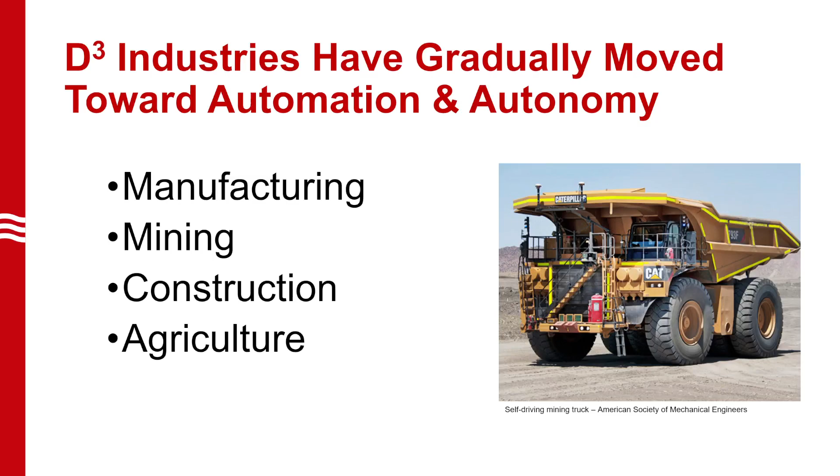On the machinery side, you've got the cotton gin, the steam engine, the tractor. Eventually, instead of transmitting power by belt, we moved to power takeoffs, and we have hydraulic systems. Now we have fully self-propelled harvesting equipment. It used to be that we pulled things in the past, my dad pulled corn pickers, and silage harvesters were pulled implements. Now we're rapidly moving toward electrical and electronic monitoring and control. This is the direction we're moving, and we have always moved toward more technology and more innovation.

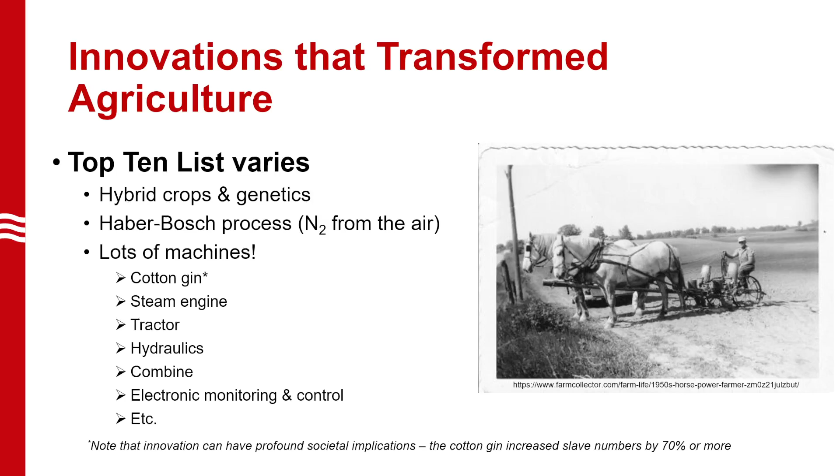So my point in telling you this is as we move towards higher and higher levels of technology, there are a lot of benefits, and I'll talk about those as we go forward. But we also have to be thinking about some of the other unintended consequences in our communities, our educational systems, our local businesses, big and small, and make sure we're thinking about it from a larger, societal perspective. That's part of the effort I'm helping to lead at a national level.

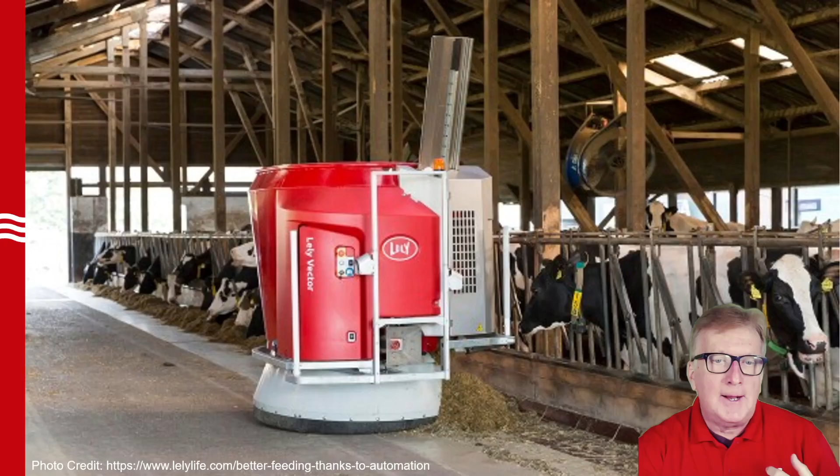I think in the dairy industry here in Wisconsin and throughout the Midwest, we're really wrestling through where this goes, and right now there's probably not a real clear consensus. It's probably also going to depend quite a bit in the future on labor policy, immigration policy, and our ability to bring workers into places like Wisconsin to do some of these jobs that other people in smaller or medium-sized rural communities don't necessarily want to do.

Consolidation, or another way to say this, is we have small companies building, inventing, and developing machine learning software, algorithms, and hardware for field operations, or maybe orchards in California, other crop production situations. Those that show great promise are then snapped up or bought by some of the bigger companies and bigger players, including some you'll probably recognize, obviously John Deere in this particular instance.

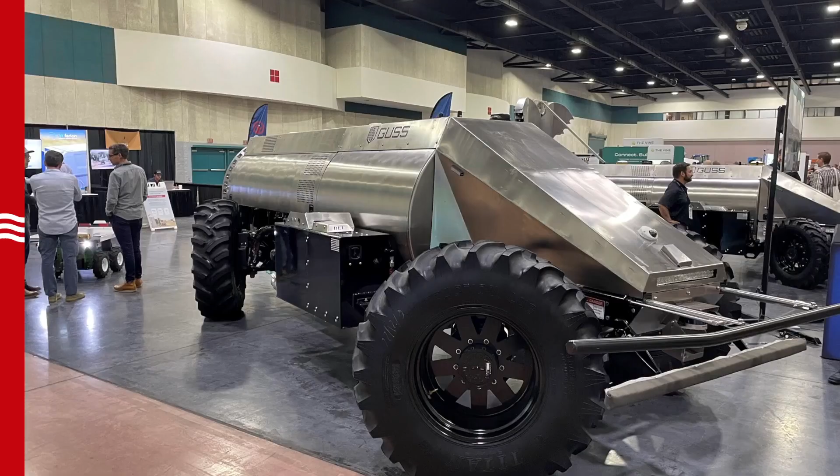Here's another quick example. This is from a conference I attended back in the latter part of 2022. This particular piece of equipment is a GUSS sprayer. You see it's this metal body sprayer. The large cylinder in the middle is the tank. This particular sprayer is designed to operate by itself. There is no operator's platform. It's not necessarily remote controlled, but it is guided by a combination of machine vision, artificial intelligence, and machine learning.

It's full of different safety sensors. Actually, a couple you can see in the front. There's like a bumper, it actually looks like a big handlebar. That's if a person does come in contact, or if the GUSS sprayer encounters an obstacle, it's designed to stop. You also see in the very front, it looks like a little bubble, a little eye. There are cameras, there are sensors.

There's a technology called LiDAR, which is now being used on a lot of these pieces of equipment. Think of a LiDAR as like a radar, but instead of bouncing radio waves, you're using light and calculating the distance for different obstacles and things you may need to sense. It could be a person, a fence post, a dog, a cow, whatever it might be.

We need to make sure that this equipment is fully capable of sensing its operating environment, and then knows when to stop or knows when to take appropriate actions. That's what a lot of my work is focused on as a safety specialist.

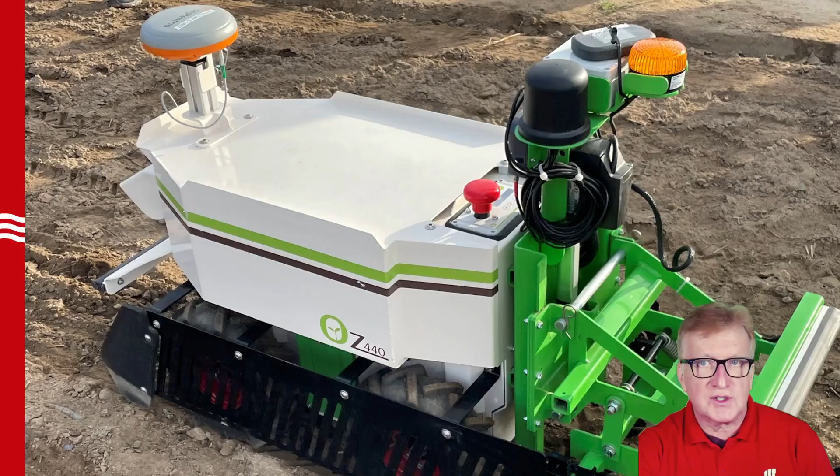This is an example of a smaller, I guess we could call this a tractor. It's about the size of a picnic cooler, these smaller things that are able to do garden or plot size operations, like planting and tillage.

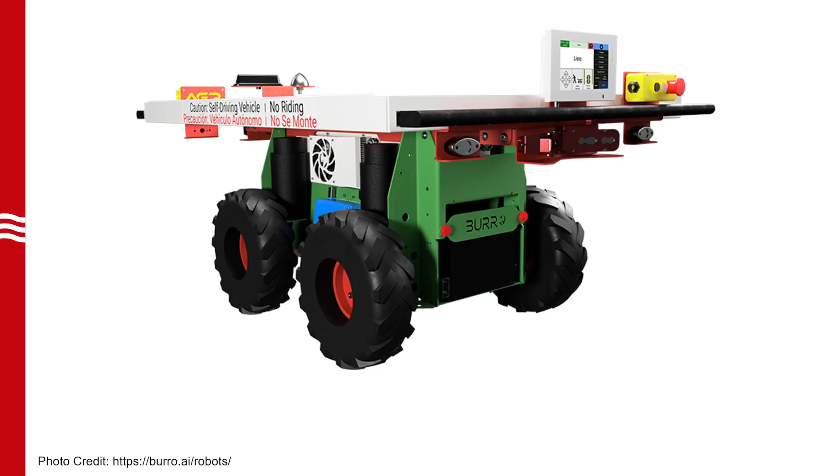And then we also see what I'm going to call helper robots. I think the brand name on this is Burro. These are being used now out in California. It's basically a UTV, a utility vehicle or ATV, that is designed to operate on its own. In orchards or vegetable or fruit crops like strawberries in California, Florida, Texas, Arizona, right now workers will pick a basket or bag full of produce and then have to carry those containers back to the end of the field, which is a very inefficient operation.

And now we're beginning to see these self-driving vehicles, these self-driving UTVs that are able to go out, pick up product. It knows how to get to the end of the field. It's able to learn what fields look like. It's able to be remote controlled with a smartphone or an iPad. And we see more and more use of these kinds of things happening. Actually, I accidentally skipped a slide. Coming back to it, I do want to just spend a moment talking about this technology.

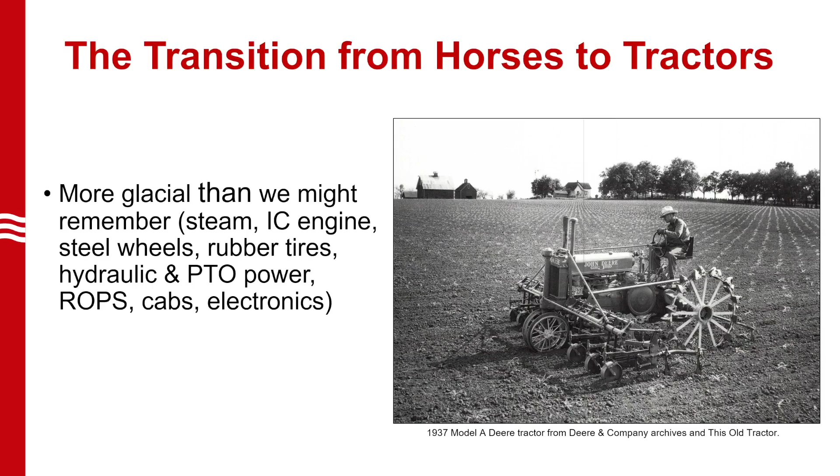Then we began to add other types of components—hydraulic systems, power takeoff—and then we did start to think about safety. We started to think about lighting and marking and rollover protection, ROPS. As we moved toward the latter part of the 1960s and early 70s, cabs became commonplace, and during that time we began to introduce different types of electronics, monitoring systems, control systems, those sorts of things.

Now let me pause for just a minute and say safety was part of this. Believe it or not, in the early part of the last century, people said, I'm really concerned about this from a safety perspective. I know my horses, they're predictable. These machines are big and powerful. So there were actually the opposite concerns of what you might think about.

The bottom line is in 1943, that's the year for which we have the oldest data here from Wisconsin—this is on my webpage, I'll talk about that at the end of my presentation—we had 166 fatalities. That's 4 times what we have here today in the 2020s, 2019, 2020.

But we also had a lot more farms. We also didn't have the systems that allow us to do some of those CSI-style investigations. So my real guess is that number was probably in excess of 200 fatalities a year.

Interestingly, though, about 20 were from horses, 18 were from tractors. So we had this interesting situation where it's going to be something we're going to have to deal with, both horses and tractors. 7 were from bulls. But the bottom line is, as technology changes, it does change the nature and the characteristics of the safety-related hazards that we need to think about.

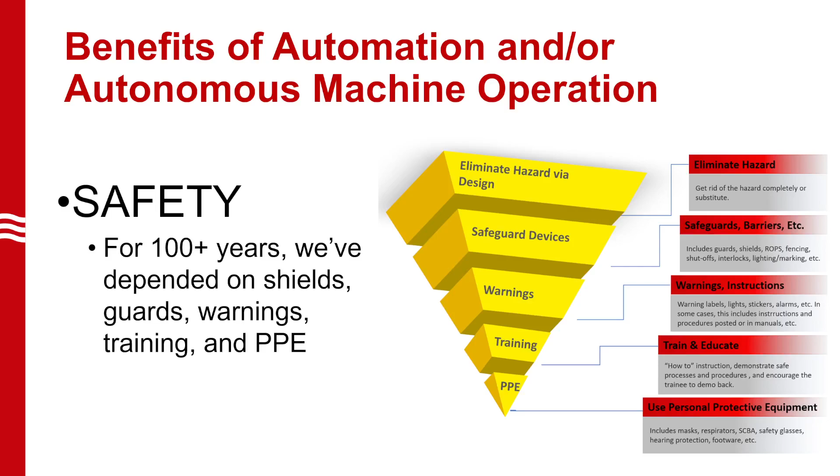We've been thinking about this sort of stuff for just as long as tractors and other types of equipment have been around. How do you eliminate the hazard associated with a tractor rollover? Well, we build tractors that have a wider center, a wider baseline of stability, they have a lower center of gravity. The old tractors from the 1920s, 30s, 40s, and 50s had the narrow front end, and those tractors were super tippy. So we haven't eliminated the hazard associated with tractor rollovers, but we've designed equipment differently. And again, that's the direction we're heading with these various forms of autonomy.

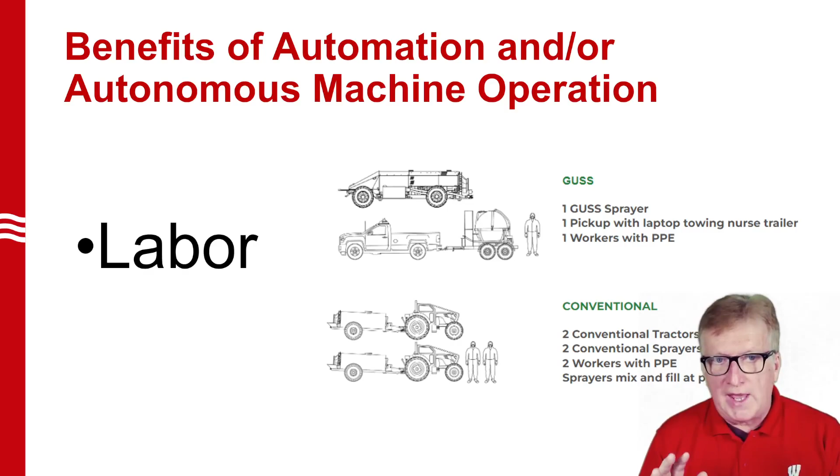Now, this is a little bit of a complicated slide, so I want to only spend a little bit of time on this. We do have the potential to save labor. This is a specific example from the GUSS sprayer, where on a small operation, you may go, just as an example, from 2 workers working in an orchard.

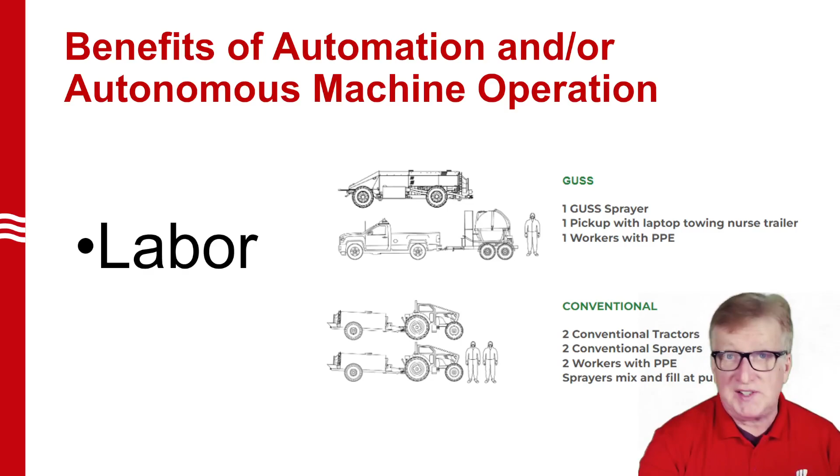Again, in California, a lot of this equipment is being used in orchard situations, but we're going to see the same types of applications here in the Midwest. You go from 2 workers to 1 worker with an investment in a piece of equipment like that big metal or steel sprayer. Where it becomes really attractive, economically interesting, is when you begin to look at larger and larger businesses.

This is where we start to see some of the custom operators and service providers benefit. On a small individual farm, you may see a 2-to-1 labor reduction. But if you think about a mid-size application business or commercial service, you might see a 4-to-1 or 5-to-1 reduction in labor. You're going to have to spread that investment over a large number of farms to justify it.

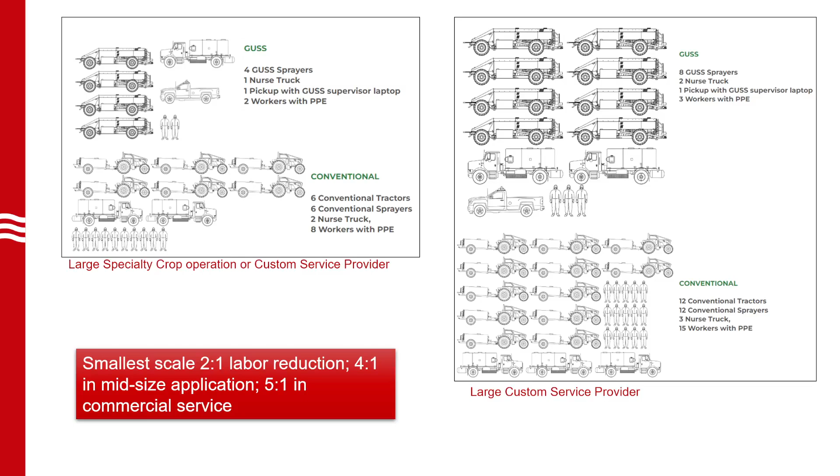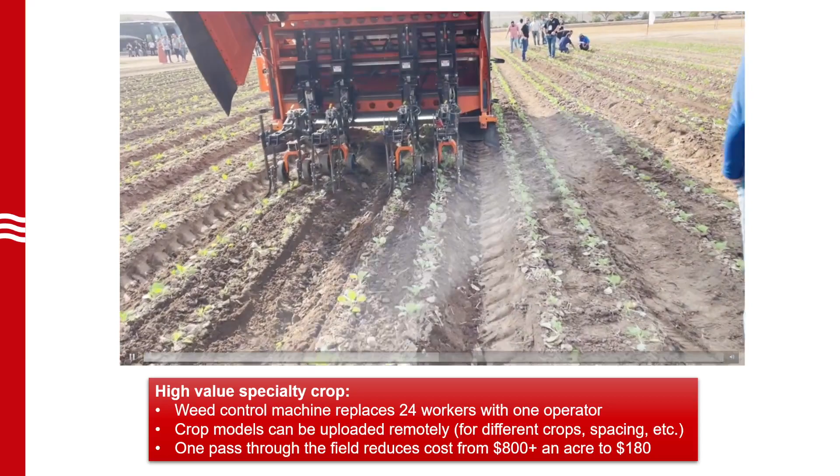So labor, kind of a big deal. Let me back up to this slide. What you are seeing here is a weeder. Again, out in California, this is something being done as a service. Now let me stop here and talk about what's going on.

What you are seeing is a weeder that is being used in specialty crops. In this particular case, I think this is a cabbage field. So what you see is one machine working in a field. This one machine is replacing 24 hired workers. It is being operated by a person walking behind the machine with an iPad, monitoring things, but you have a 24-to-1 reduction in the labor needed to weed this particular field.

What's interesting about this is it's all digital, connected to the internet, requires broadband. When the operator takes this weeder, loads it onto a truck, and moves it from field to field - say going from cabbage to romaine lettuce - there is a remote operator actually supervising a dozen of these machines located all over the country, and they are able to upload the right crop model, including plant spacing, row spacing, and all the parameters needed for the job.

From an economic and labor perspective, what you're doing is taking a piece of equipment and removing the ergonomic hazards. This would all be work done manually by hand with people, probably immigrant or migrant workers carrying hoes and other hand equipment. You have significant exposure to sun, skin cancer, those kinds of things, in addition to the ergonomic related hazards. And you're replacing 24 of those people with one person.

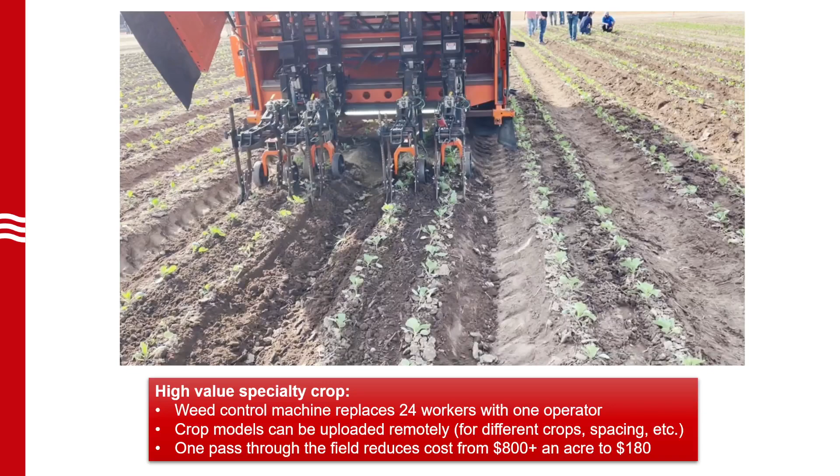Now, I'm not going to go back and restart this video, but I'd like to note - you might look at this and ask how and why is this any different than something I grew up with. I grew up doing this sort of work in corn and soybeans with an old John Deere 630 tractor and a front-mounted cultivator. So this machine is essentially accomplishing the same thing between the rows.

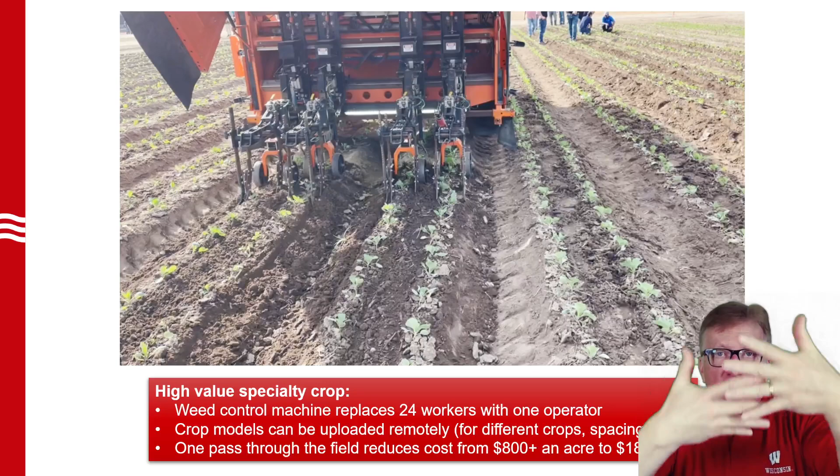But because this new automation has cameras, machine vision, machine learning, and artificial intelligence, not only is it taking weeds out between the rows, but it's also able to weed between plants without taking out the plants themselves. It can recognize and differentiate between a cabbage plant and a weed, and those little shovels, those little cultivating devices, are able to move in and out with hydraulic actuators and actually weed, not only in the row, but between plants as well.

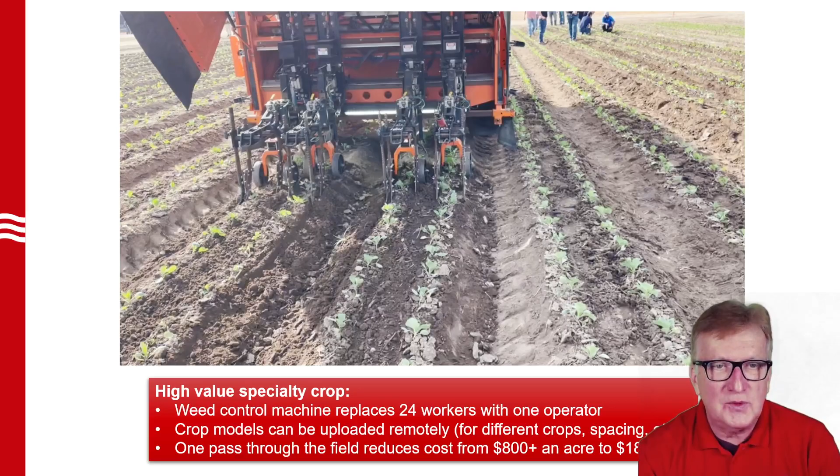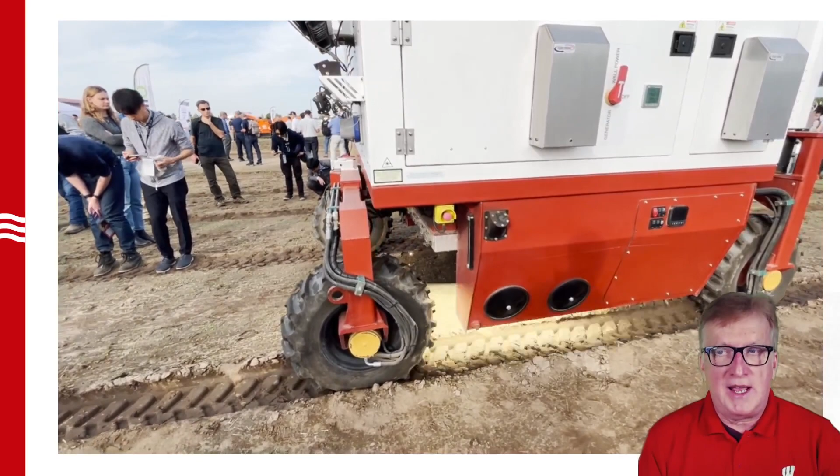Another quick example to show you here. Hopefully this is communicating and you're able to see the flashing lights that are happening. This is another weeder, and it's a laser weeder - you can imagine it is using a laser. This is operating in a high density crop, in this particular case spinach. As it goes through, you see the little weeds, the little fireworks happening between the wheels, and that's actually the laser beam that is killing weeds.

It's burning weeds using a CO2 laser. Probably not ever going to be practical for an individual farmer, an individual operator, but as a service, as a subscription service or a custom service, that's where this type of equipment shows great potential.

I probably should mention, we do have a number of industries here that are prominent in Wisconsin that are interested in this sort of thing and how we might adapt this, for example, to a cranberry marsh up in the central parts of Wisconsin. It's not going to be this machine in particular, but how might we think about these types of applications in the future?

The other thing I should mention from a safety perspective, you can imagine these new technologies eliminate some safety-related hazards, but they introduce others. You wouldn't want to have a child or a pet out working near a CO2 laser, because obviously if a person or a pet or an animal got underneath this particular piece of equipment, it could do great damage and harm.

So we have labor savings as a potential, we have potential safety benefits. I want to also just talk briefly about a few more things: the opportunity to reduce input costs and create a more sustainable situation. This is obviously a societal demand. All of these things are enabled and made available to us through high-tech sensors, machine vision, artificial intelligence.

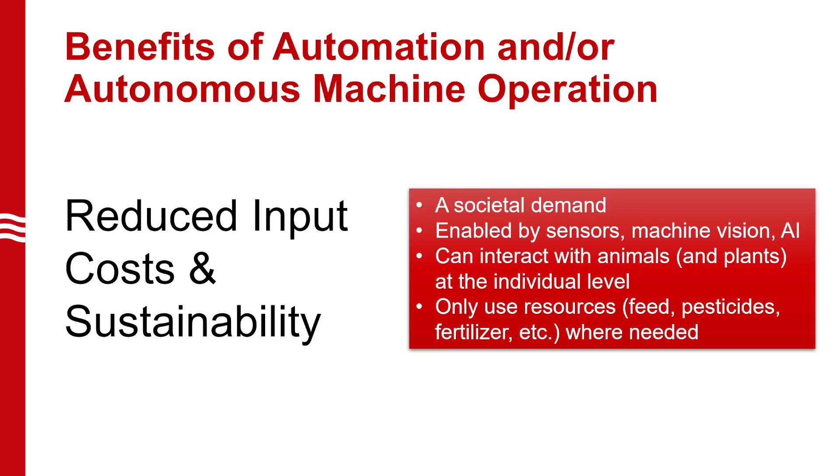We are then able to only use resources like feed and pesticides and fertilizer and especially water in areas and situations where it is most needed. What else? These allow for 24-hour operation, nighttime work operations. It's potentially a solution for people who have disabilities or physical limitations.

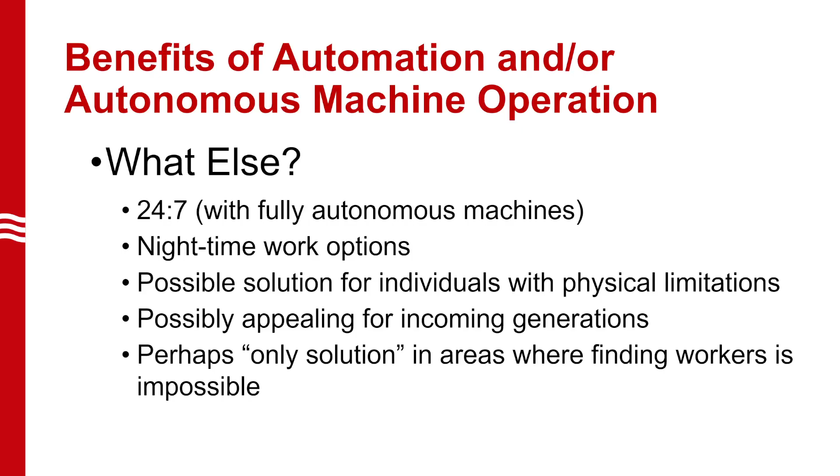The other thing that I find interesting about these new technologies, it is probably going to be appealing for the incoming generations. It is probably something that we're going to need to think about, whether you are a custom business or you are a farmer, in terms of succession and looking at bringing that next generation in. And again, as I've talked about, it could perhaps be the only solution in those areas of the state or those areas of the country where you're having difficulty finding workers.

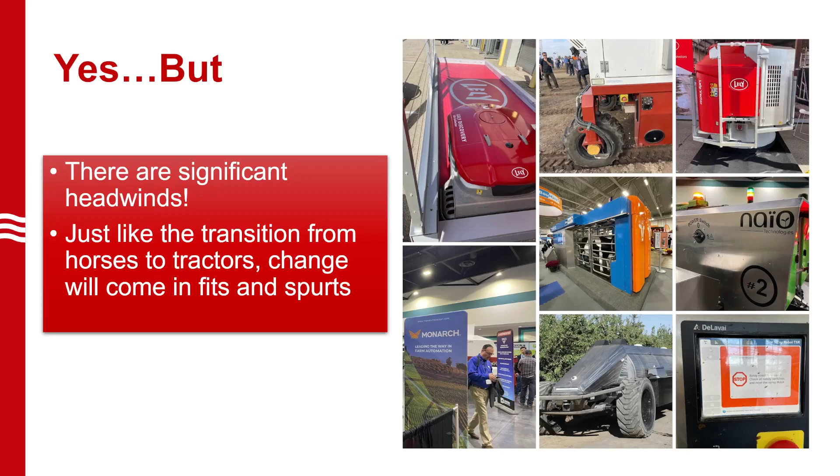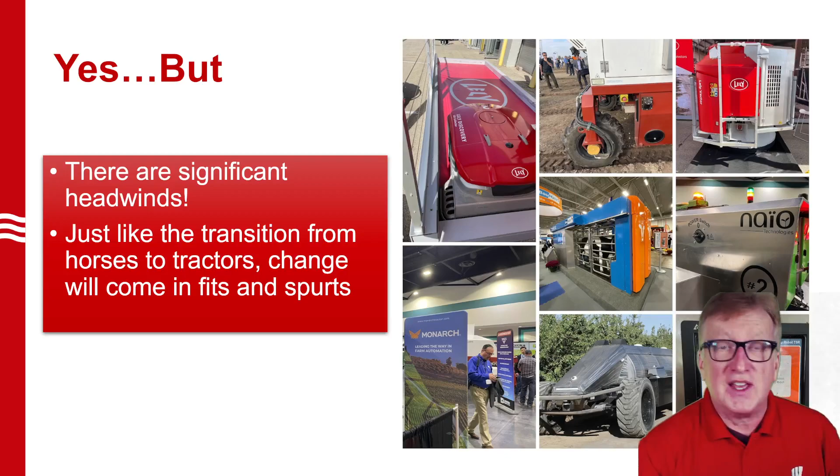So you can probably gather from my presentation, I'm a little bit of a technology evangelist. I want to be careful with that, though, because there are a lot of headwinds that we really do need to be thinking about. And just like that transition from horses to tractors, things are not going to happen easily. They are not going to happen overnight, and we're going to see fits and spurts happening.

In my work, because of my focus on safety, when we talk about automation and we talk about sensors and machine learning and artificial intelligence, it is a whole different world. Yes, we are designing out some of the hazards consistent with that upside down pyramid that we call the safety hierarchy, but we also need to be thinking about what types of new hazards might we be introducing.

We typically do that with a process that engineers go through. I actually teach it in the classroom, called risk assessment. And with risk assessment, you look at things that have happened in the past and you make sure that you apply the appropriate types of design principles and design standards so that you improve the safety of the system that you are inventing or designing.

The problem is risk assessment requires data, and with brand new forms of equipment, we simply don't have that data. I've done 150 of those CSI style investigations on tractor rollovers and power takeoff entanglements, but I've not yet done one on a robotic injury or fatality. I don't know that there have actually been any, but in the future there likely will be.

And so the question is, how do you assess risk in an environment where you don't have a past history? That's really a big focus of the work that I do. And it is also, not having that data is actually something that is creating a bit of a barrier. So risk assessment requires data. And what about the new hazards associated with artificial intelligence? We don't always know exactly how these machines are going to operate.

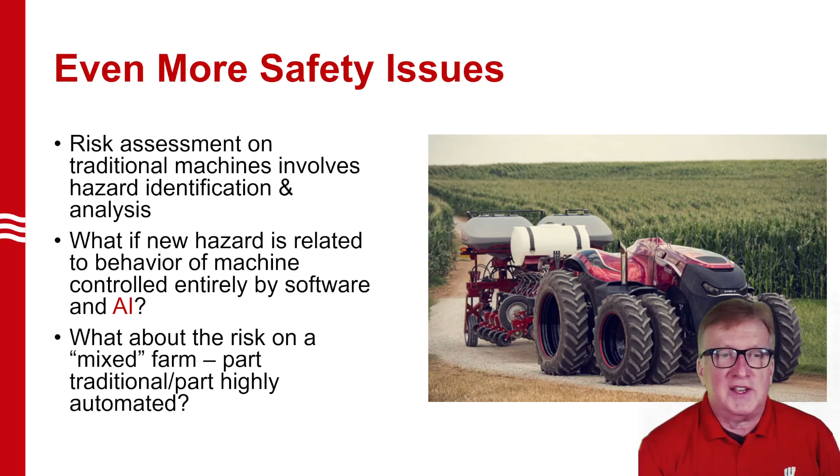The other thing I'm working on in my research and collaboration with people around the country is the situation where on a farm we have some highly automated or autonomous equipment and then traditional equipment. This is a real issue with workers and training, especially if we're bringing in young people. We also need to think about certification programs—how do you develop a full-scale certification program for operation and safety when we don't yet have experience with these new innovative technologies?

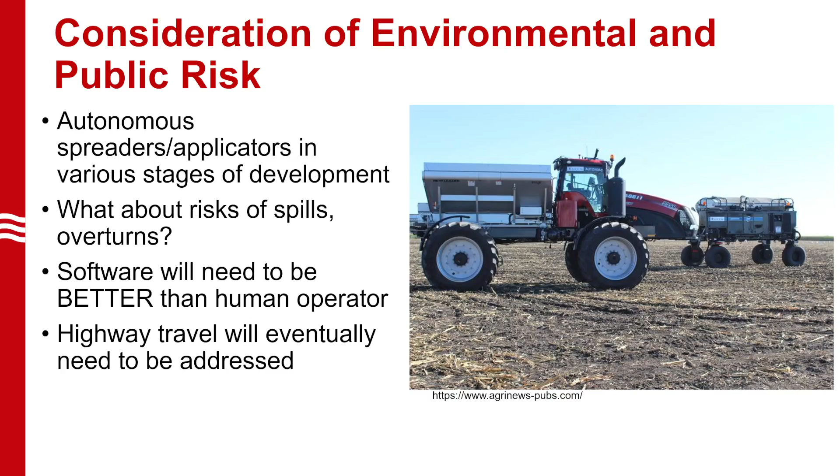And then finally, we're going to have to eventually think about highway travel—a lot of related issues. Because my time is tight today, I won't spend a lot of time on these. We do worry about cybersecurity—what happens if a machine goes down, either intentionally or unintentionally. Diagnosing and repairing a software-based piece of autonomous equipment is totally different from manually replacing a ruptured hydraulic line or changing the oil in a vehicle. It's going to require a whole different degree of skill and training, and I do think it presents opportunities for people who have a vision in this area.

We're also quite concerned about broadband access. Still in Wisconsin, about 20% of our farm operations have significant parts of the farm where you don't have broadband access, either through smartphones or hardwired internet. I know there's a lot of talk about Starlink as a potential solution—I'd caution you a little bit. Starlink is not good for mobile use, so I think we're going to have to continue to push on broadband.

We also know farmers are quite concerned about data—they're concerned about security, concerned about privacy. If you look at the data, about 54.5% of our farmers, even without autonomous equipment in the equation, are concerned about their comfort level keeping up with new forms of technology.

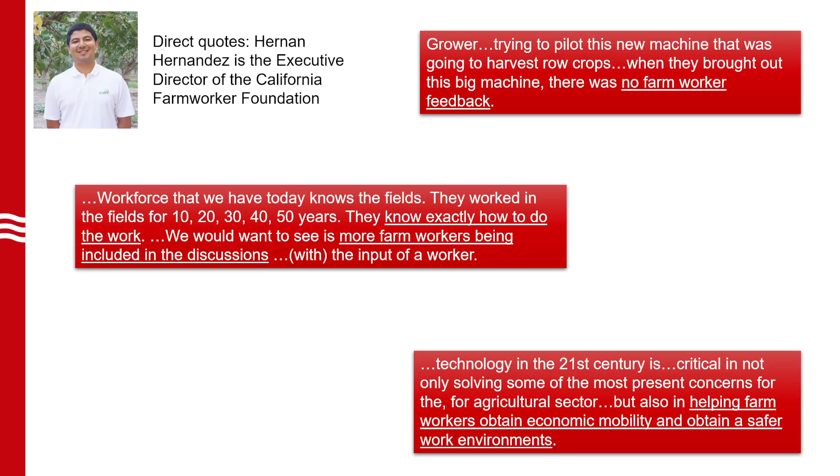Economic trust is also going to be important. Trust between farmers, workers, engineers, investors, technology gurus, as I mentioned earlier. Deciding to more fully automate and invest in technology is not like deciding to spend $9.99 on a new smartphone app. We need case studies. We need economic analysis over a multi-year period. We need other data, documented testimonials that represent the diversity of agriculture, geographies, regions, and climate.

Final thing I'll say from a safety perspective is we have to do this right. There's a person named Peter Sandman. Sandman talks about how risk includes not only reducing the probability or severity of an incident, but also a concept he called outrage.

What happens is if you have things that are kind of industrial versus natural, or exotic versus familiar, or unknowable versus knowable, when something bad happens on a piece of equipment that is considered industrial, exotic, and unknowable — that could be that stainless steel sprayer that looks very industrial, looks rather exotic, isn't very familiar to us, and if it's being operated by machine learning and artificial intelligence, it's not always fully knowable — those are situations that could result in a huge amount of outrage, which could actually serve to cripple a project or technology.